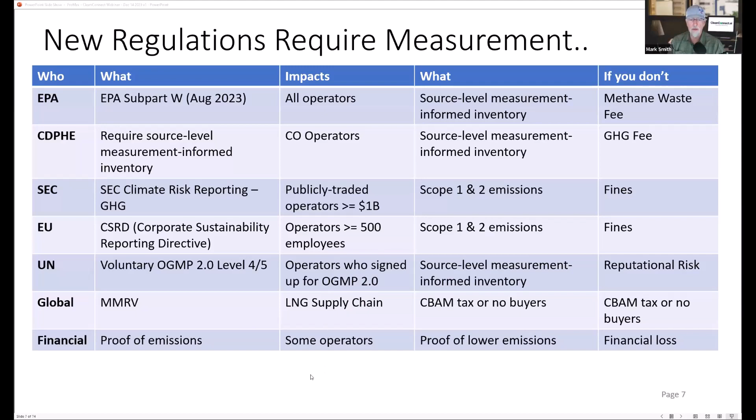But this one, the follow-on MMRV, which I'll get into, impacts anybody who wants to sell into the LNG supply chain. 20 countries have agreed to use this particular framework as the basis for trading LNG. The EU has said if you can't meet this framework or get below a threshold, there's a potential carbon border tax. We also have clients who need to prove their emissions as part of a sustainability-linked loan, or because they have ESG investors, or for numerous other reasons, even insurance companies requiring proof of emissions. So lots of reasons why you need to measure.

EPA subpart W, the timeline. As an EPA cheat sheet - I've been covering this stuff a lot so I'll go over it briefly - basically subpart W drafts hit in 2023. Quad B and C were finalized, and that's done now. About mid-2024, the states have to send in their SIP plans, or state implementation plans, to the EPA, and then subpart W will be finalized. The new super emitter regulation is another reason this is going to hit - basically satellites flying over the continental US, and eventually I'll show you the world, looking for 100 kilogram per hour or more leaks.

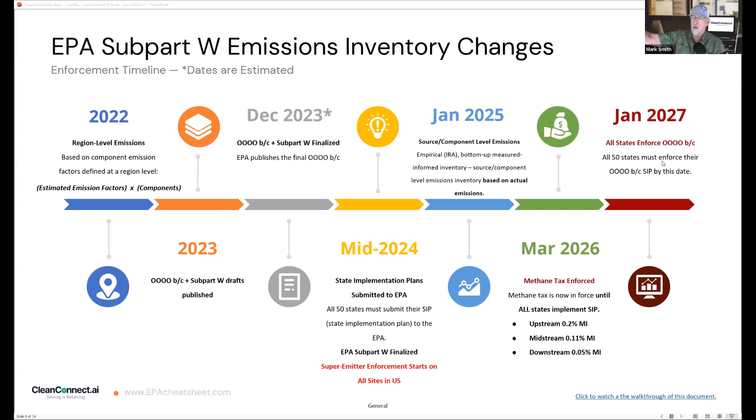January 2025, everybody should be doing source level measurement, okay, to do a source level. Then March 2026, you turn in that 2025 data and you could have a methane fee based on that data. Upstream, if you exceed your baseline of 0.2% methane intensity - midstream is 0.11, downstream 0.05. And January 2027 is when those states are supposed to implement their plans, which are equal to or more strict than Quad B and C and subpart W.

Here's something in a global look of it. So as I mentioned, a lot of these things are coming - 2023 the drafts, 2025 empirical measurement starts for US, EU CSRD. The methane tax kicks in, EU reporting is due, and this global super emitter thing is happening. So it's happening in the US, could start as soon as next year. It could start worldwide in 2026, and then carbon border tax.

The worldwide piece - is that still part of the EPA regs, or is that different? No. What's happened is, as part of this whole MMRV, these 20 countries said, hey, we're going to do the same thing. Gotcha. So basically, if you're a satellite company and you qualify, you can not only win a US contract, but a worldwide contract. Okay.

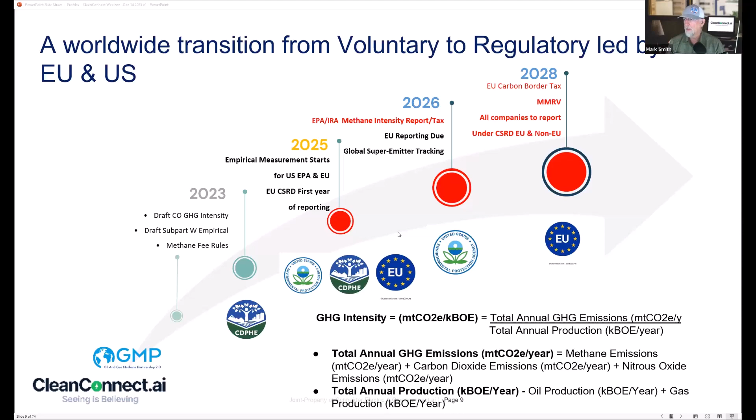So when we look at this, as engineers, software engineers trying to figure out how do we solve this for our clients - is this 5 different projects or one project that has 5 outcomes? So we look at the puzzle of the EPA stuff: subpart W, Quad ABC, MMRV, OGMP, Colorado's regs. And Colorado is probably the toughest of all of these, to be honest. That's where we got our government approval, and then financial and SEC. So we look at the whole puzzle.

Subpart W introduced this idea of 5 new measurement methods. Basically, the lower the number, the lower the uncertainty, whereas higher numbers mean higher uncertainty. Direct measurement is method 1 - so like a continuous flow meter, or our solution, continuous OGI with quantification. How you determine if you're there is if you can measure the duration, size, and source of an emission event.

Then they introduced the idea of engineering calculations, and ProMax is actually mentioned in subpart W 26 times, saying ProMax version 5 or higher is an approved engineering calculation tool. So when you combine direct measurement with a calculation, you can get method 2 - we'd combine it in different ways to get this, and I'll show you an example. Then, if you'd like, you can use ProMax by itself for a site-specific simulation - that's level 3. Level 4 is where you're using LDAR, so you can reduce the number of days in the duration of an estimated leak. And number 5 is basically emission factors, what we have today.

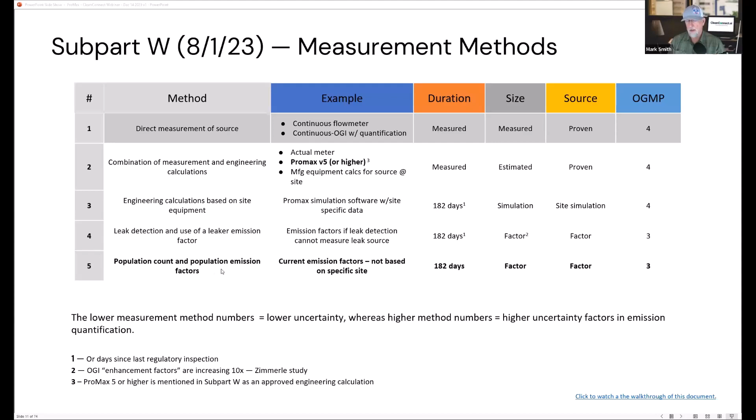So an example of why measurement is important is this: let's say you had a cold venting, unlit flare. Direct measurement - let's say our OGI would go around and catch it.

We'd see the start and stop times and we would send an alert. Let's say our client was able to reboot, separate, or do whatever to get that thing back, and 50 kilograms were released. Under the Inflation Reduction Act's third-year tax at $1,500 a ton of methane, that would be about $75, and it's below the 100 kilogram per hour threshold of a superemitter, so it's not one.

But let's say you just had a thermocouple and temperature started dropping. SCADA sent you an alert, and you rebooted it, but 200 kilograms got away - that's $330, and yes, that's a superemitter.

But now you get down to just calculating by itself with no direct measurement. Subpart W forces you to use some of these defaults, like 182 days, or the default emission factors. You can see it could add up quite a bit if you were to use tax. Again, this isn't supposed to be tax advice or anything like that - we're just trying to show you what these different measurement methods get, all the way as you fall all the way down.

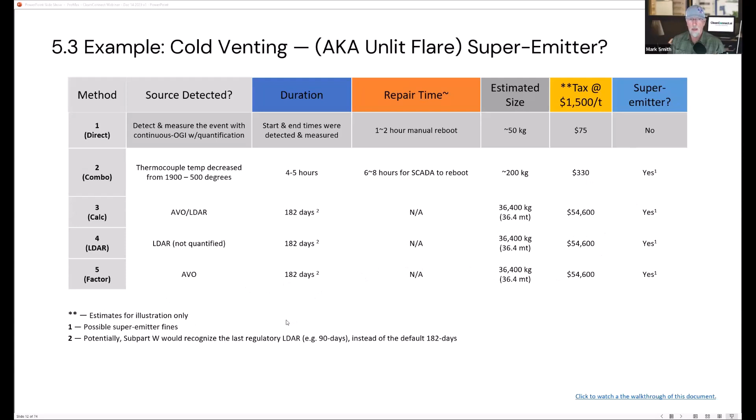Now, LDAR, for example - you could make a claim, subpart W does have something to say about it. But I did a regulatory LDAR 90 days ago. Can I use a 90-day default instead of 182? They seem to allow that to happen. And then factor 5 is just standard emission factors. So you can see the implication of direct measurement - why you're really going to want more of that.

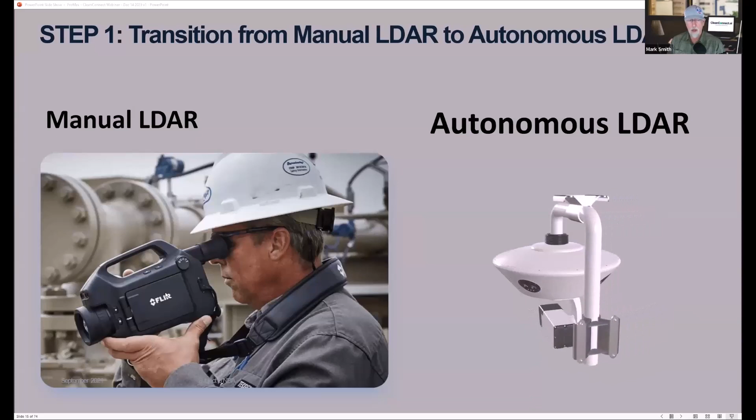So, monitor, measure, monetize. Our first use case is autonomous inspections. It's basically taking what most of you do - guys going out and doing manual LDAR - and replacing it with autonomous LDAR.

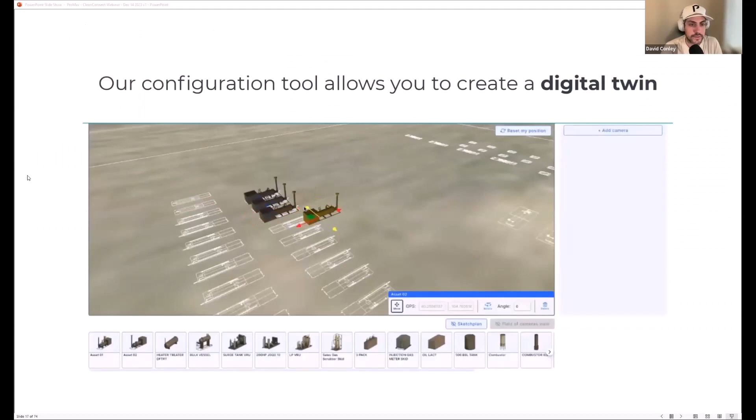In our scenario, typically we have one camera on a site. It can cover, I don't know, David - 99% of upstream sites are covered by a single OGI camera mounted on a pole, along with some other cameras. That's about right? Yeah. The exact numbers, or the certification, allows for up to 100 meters at 5 kilograms or less MDL. Our recent testing gets us closer to 280, 300 meters, depending on the size of the leak. So in terms of a superemitter, 5 kilograms an hour is much different than 100 kilograms an hour - so yeah, we've got quite a bit of range for sure.

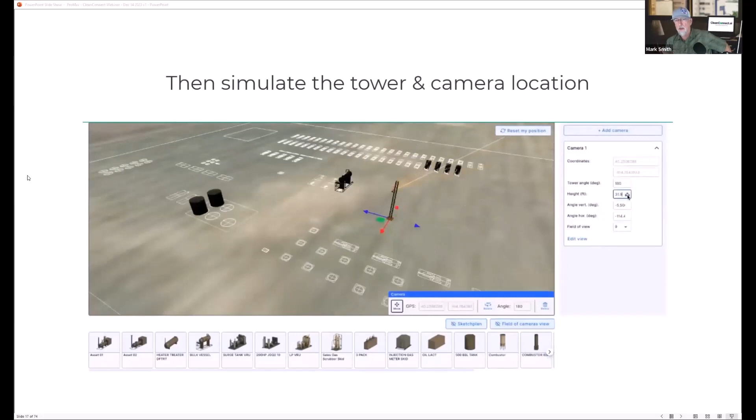Now, one of the things your team has built, David, is this brand new digital twin thing. At first it was just built so we could not guess where to put a tower, but literally simulate on site. So when their installers are there, they can tell precisely where to put it for the best viewing angle.

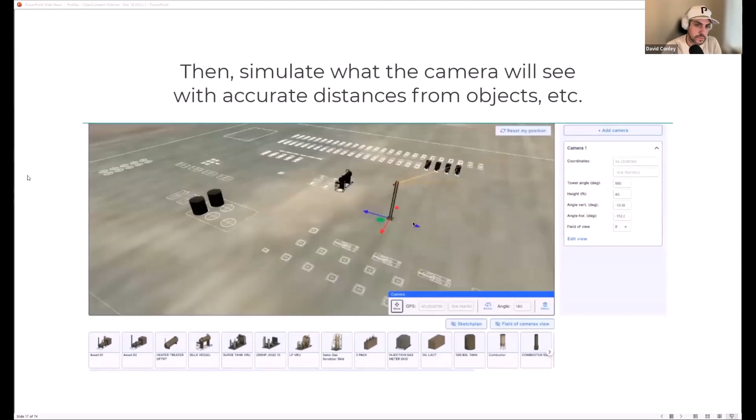And then in addition, when you get down, we allow tour stops within it - so if you say these 4 tanks in a frame, you could name it, set the pan, tilt, zoom, whatnot. But then also you're able to draw a polygon around a specific object, so that when we see an emission event on that tank, you can then measure the emissions for that specific tank. But it allows us to do some other things.

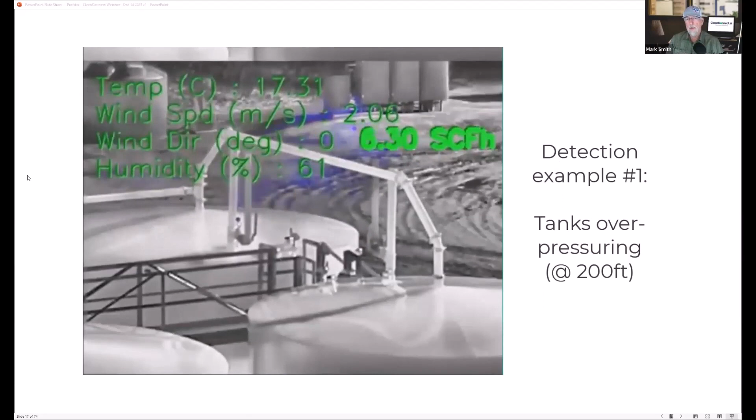Here's a tank overpressuring 200 feet away - as you can see the leak, you can see what it is, you see it's being measured. Here's cold venting at 4 a.m., 300 feet away. So yes, we work day or night.

24/7. And here's one that really drives some technologies crazy - a load out event. A truck shows up, doesn't connect correctly, starts leaking, and then it drives away. So after it drives away, you still have to figure out what the source was. Yes, it's an emission event that could literally, if it was leaking that much, create a superemitter event. You get dinged, but at least you could have the proof with our stuff - you caught it, and you're showing them, 'it wasn't us, it was a third party truck.' Now they may blame you anyway, but okay.

So how many videos do we have? We've been doing this continuously on so many sites that we've got well over 1 million videos. Right now our model's trained on 30 million data samples or so. So the things we see are cold venting as a big one, tanks overpressuring, loadouts like you saw, and others. That's why we showed you those 3 examples - because they're the 3 most common things we see.

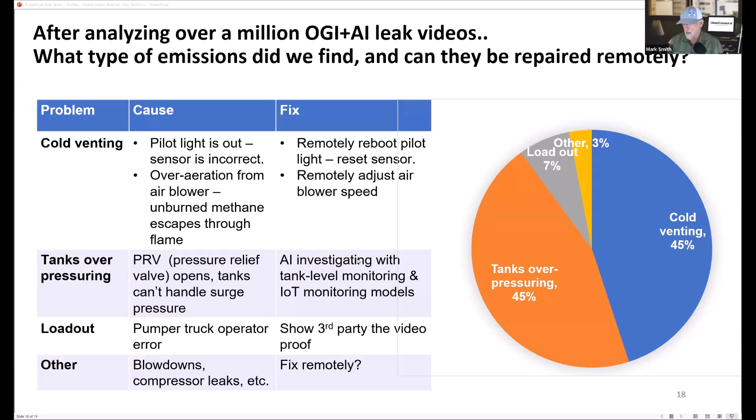So not only can we monitor them, we measure them, we can report on them, but you're going to see later in this presentation how we're actually trying to prevent those things, even prevent super emitters.

Okay, this is what we had to do to get our Alt-AIMM, the alternative approved instrument monitoring method from Colorado. We had approved source level detection, then blind testing, and David can talk more about that, and then LDAR equivalency. We had to prove that our autonomous LDAR was equivalent to monthly manual LDAR. Alternative work practice: we had 2 operators endorse our application, and then we got EPA Region 8 approval. And it came with a workflow.

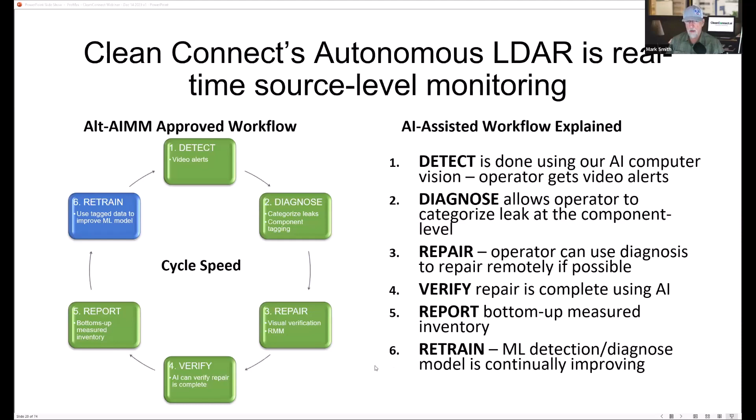So what it means is that if you use CleanConnect, it replaces the need for regulatory monthly LDAR, regulatory AVO, regulatory tank emission monitoring. And for our clients, that eliminates 92% of the regulatory scheduled callouts.

Now, what's new in the brand new Quad OBC that just dropped, it's very similar to the Alt-AIMM, okay? They added a few innovations, I think. Proven spatial resolution: so when alternative technologies apply, they have to have a proven spatial resolution. In our case, we're at a component level, so we can see within 0.5 meters of a source. Area level is 2 meters from a source, and anything above that is site level. Same blind testing protocol. Equivalency, you prove against—in this case, for EPA, it'd be quarterly LDAR.

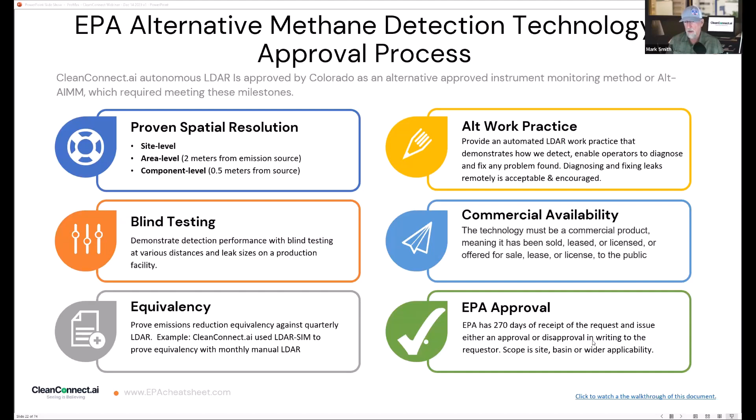Alternative work practice. And then they added the commercial availability—they will not approve anything that isn't available to the public to be sold, leased, or licensed, okay? And then, of course, EPA approval gets you countrywide approval. They have a portal with timestamps, and if they don't refuse it within 270 days of receipt, you're going to get approval or disapproval.

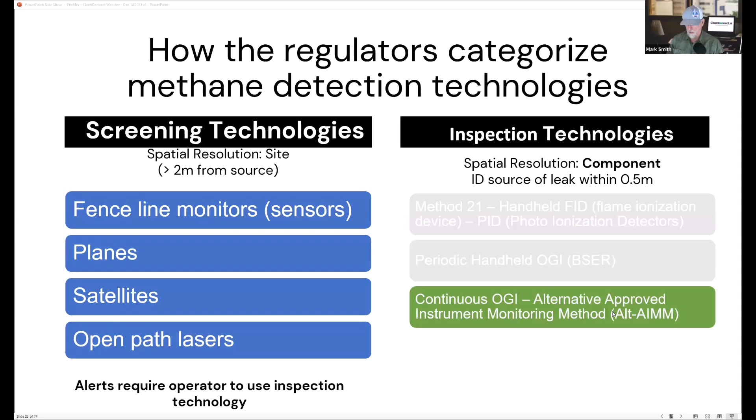Now, where the spatial resolution really comes in on the regulations is this. Screening technologies are anything that cannot see less than 2 meters from a source, or it's greater than 2 meters—so fence line monitors, planes, satellites, open path lasers. Alerts require the operator to use an inspection technology. So with these continuous things like fence line and open path, every 7 days, if it exceeds the baseline, which is set in the first 30 days of operation of the particular technology, then you're required to send an inspection technology. Inspection technologies are defined as a spatial resolution of component level—so Method 21, periodic handheld, or like our solution, which is continuous OGI.

And anyway, David, you could talk about this testing that we did for blind testing. Sure. Yeah, I actually have a question in the queue that I can answer while I talk through this.

Someone asked, what are the limitations of autonomous monitoring? For example, OGI has wind and temperature limitations. True, right? And whenever we go back and talk about equivalency, that's the key—what is equivalent versus a monthly LDAR inspection. In Colorado, it's monthly; in other states, it's less frequent. So whenever the temperature and wind change, you're going to see something, right? So depending on the temporary conditions, that doesn't disprove equivalency, if that makes sense, in the modeling.

So yes, you're right, there are conditions that are less conducive to detections, but how long do those conditions last, right? And is it going to be more frequent than every 6 months you're running an LDAR inspection, right? So that's kind of the lens that you back that up against, if that makes sense. So I hope I answered that question, but also this is going through kind of the blind testing results.

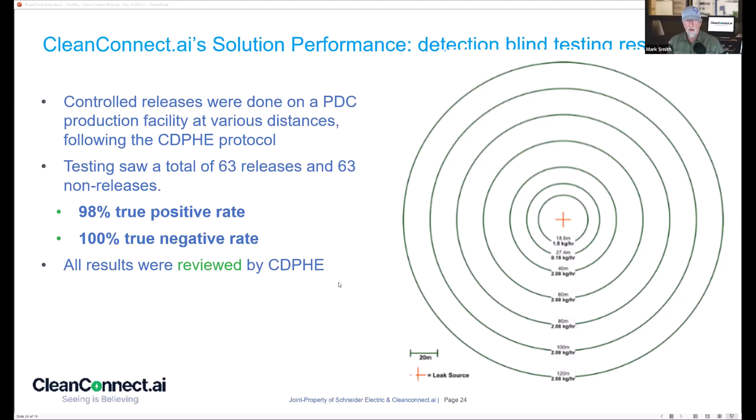We did all these in our production facility, the blind testing, and all the results were reviewed by CDPHE, the Colorado regulators. And then we also used that data to do quantification. You talk to this slide a little bit.

Sure. As part of that, with that controlled release data that we have, now we have ground truth—truthfully, this is how much is leaking at this flow rate. So we wanted to back-test that and see how accurate the quantification coming out of the AI model is, just without any additional information, which we've tightened with ProMax. And so that's the magic, right?

It is. We have these raw data outputs coming from the OGI plus the model simulations, and that's a little bit of the magic we'll talk about, cracking the code. But this is raw data.

78% accuracy with an 8% outlier rate, and that's tested against 2 kilograms an hour leaks. So that's just what the data look like—it's just kind of raw data.

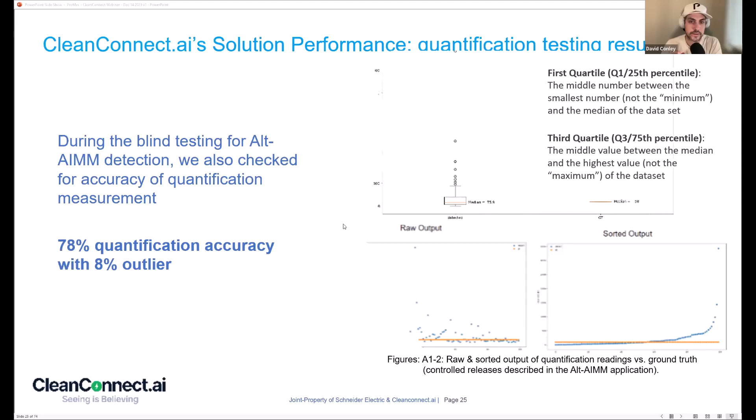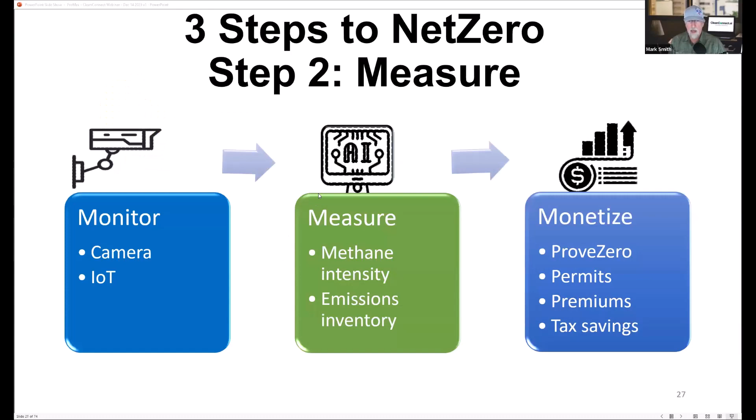So, next step, measure. One thing that's important, especially for our clients that do OGMP, is this idea that they have these 5 levels. I won't even talk about level 1 and 2. Level 3 is called generic emission source level—this is equivalent to today's emissions inventory, which is emission factors.

Level 4 is specific source level measurement inventory. That's first, and then you reconcile at the site level. That's one of the things we'll be showing you how we do.

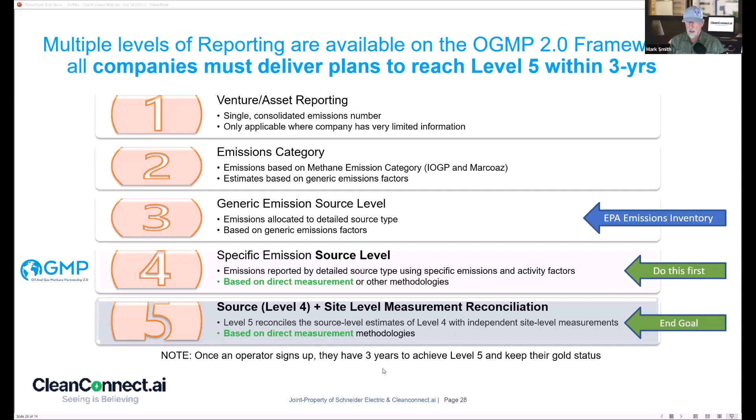Now, building on top of OGMP level 4 and 5 is MMRV. These countries have gotten together and agreed on this measurement, monitoring, reporting, and verification protocol that's built on top of 2.0. So they're starting there, saying if we're going to be trading LNG, for example, between these or any other product, this is the protocol we're going to use to measure that methane in terms of carbon border taxes or whatever.

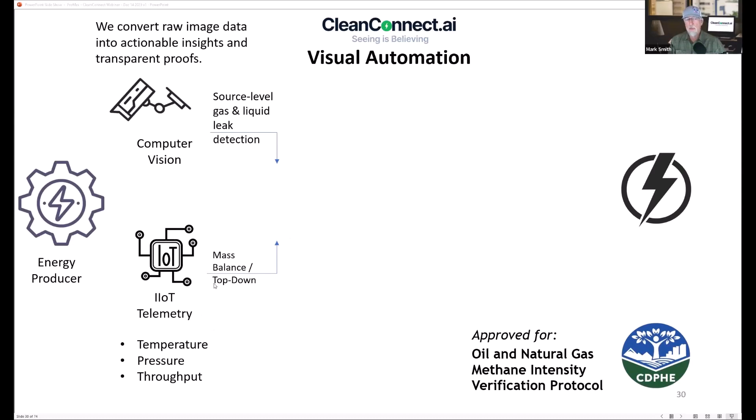We built the computer vision stuff, but now we tap into the IoT devices, and we add BR&E, the ProMax version 6, with the data exchange feature. All that runs through our AI model.

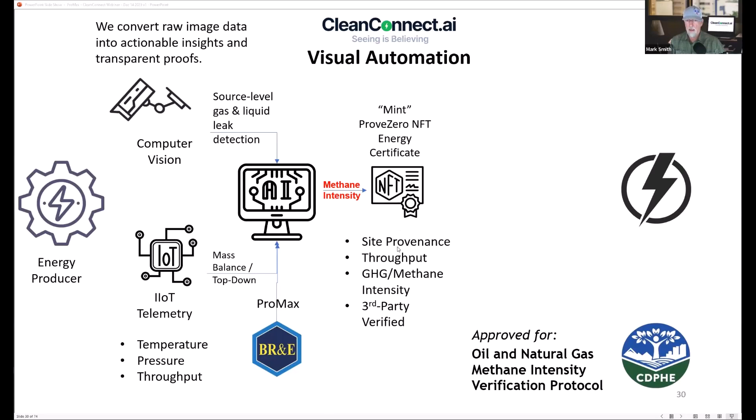The original idea was we had a client, Triple Crown, that said, hey, can you create for me autonomous methane performance certificates using the S&P protocol? So we did that. Then Colorado came out with their source level measurement informed inventory, which was originally called Reg 22, or Regulation 22. We were approved, built into their regulation and framework—ProveZero is the name of our system to do that.

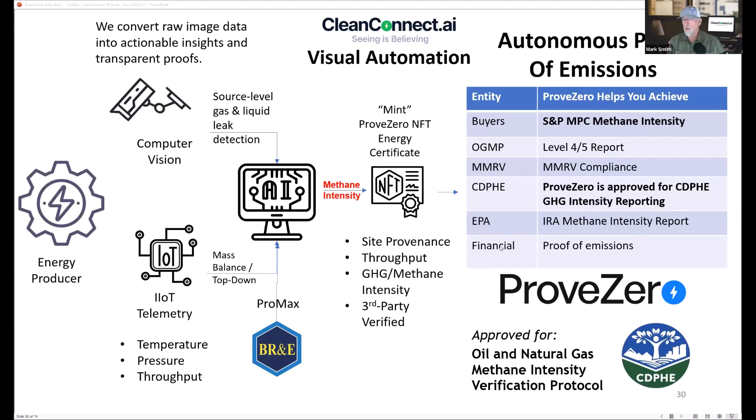In addition, we started looking at the puzzle piece and saying, well, if we can grab computer vision, measure leaks, look at the IoT devices, and run that through ProMax, what all can we do? Can we help produce some of these other reports as well? So this section is autonomous measurement using ProMax plus CleanConnect to automate emissions tracking with process simulation.

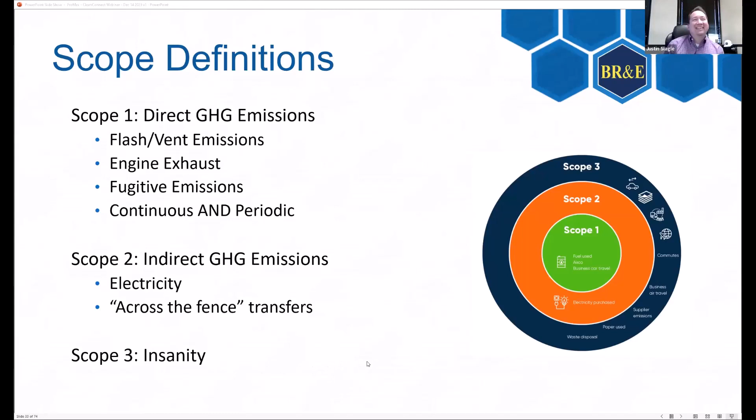That's a scientific term, insanity, right? That's right, there's the definition.

So then basically the reason it matters that the SEC is getting involved is because there's one really important document that your board of directors are required to submit to the SEC. These are for publicly traded companies, and they're going to need to submit their Form 10K. Now this is an important document because if you are found lying or hiding things along those lines here, you can actually be found criminally responsible for it. So it's going to be something - I'm not a lawyer here, but that sounds pretty important to get right.

And so that's going to bring in a whole bunch of different people to calculate these emissions, and the board of directors are going to need to be working within the company in order to find out what those emissions are.

But when we're looking at all of this, there are several different methods of calculating these. Looking at those top three, there are your emissions factors, and that's pretty much old news these days. The emissions factors are the quick and dirty way to make these types of calculations. It looks like these agencies are moving further and further away from recommending those emissions factors.

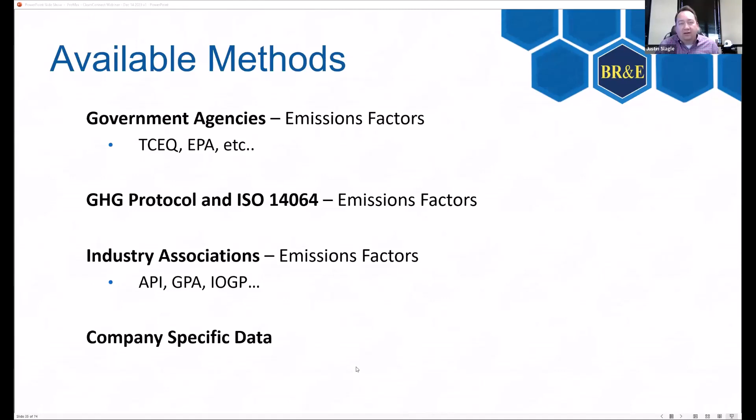But then we have the company specific data at the bottom, and that's actually where we plug in both CleanConnect and ProMax, which is why it's making it quite reasonable for us to be working together on things like this. A company's specific data could be things like using direct measurements like flow meters and cameras and LDARs, things like that. There's emissions software that you could use as well.

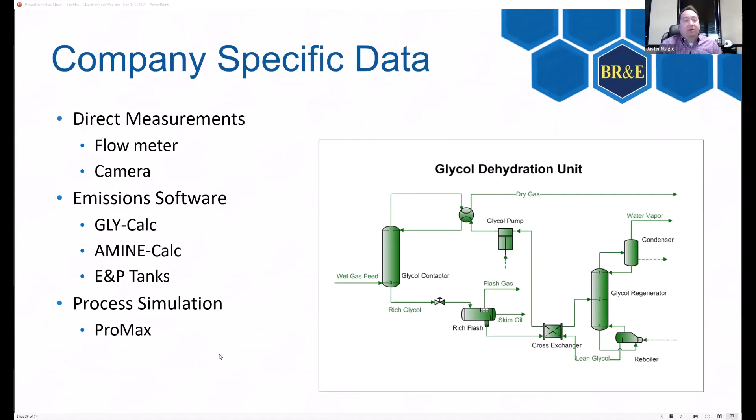Those three that come under the emissions software, those use more of a correlation type calculations, which are more so on the emission factor side of things, but not quite emission factor because it brings in more of your company specific data. But then we have process simulation down there at the bottom, and that's the one that is going to be fully customizable to your site. The reason I say that is because that one actually takes into account the first principles approach to calculating these emissions. It uses a physics-based method of calculating emissions, so it's actually not using factors at all anymore in this. And now you're actually getting real defensible, realistic results that are actually backed up by the science, not just by a bureaucrat coming up with a factor.

Right, and just to comment on that, that right there was kind of the aha moment for me. We were sitting down working through mass balance, and one of the chemical engineers we're working with, she said, well, I can see that source. Can you tell me what pressure and orifice size and temperature is in that line? And I can tell you how much is leaking. And that was it, right? It was wait, the visual piece of it mixed with the thermodynamic modeling and the physics of ProMax, and now I can give you a duration, right? And now all of a sudden you have a very interesting case of measurement, a very defensible measurement right there, so that was it. I mean, that was cracking the code from my perspective. Excellent, yeah, that's a good way to put it, because ProMax will not let you break the laws of thermodynamics.

And so that's kind of a neat thing about it, is a good sanity check of what you're actually calculating. Yep, good point. So then let's look at what we have, what the operators are looking at.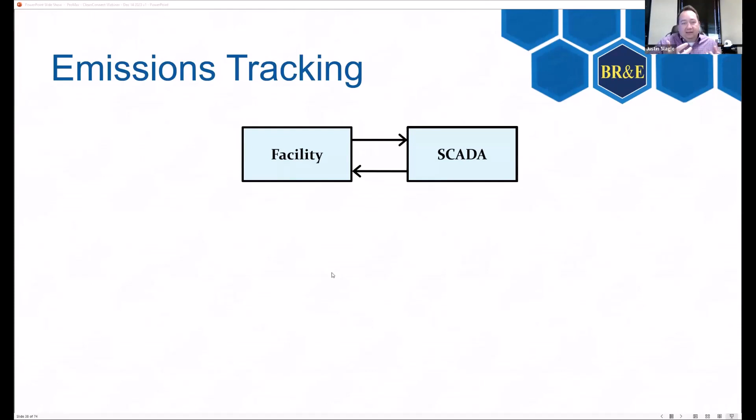So they have a facility, and they connect that facility up through instrumentation with a SCADA system, which will take the data that those instruments report from the facility and organize it and put it into some type of format, which will then go into your historian. All of this is currently automated. Typically, when you install the instrument, you create a SCADA system, and then you attach that with a database.

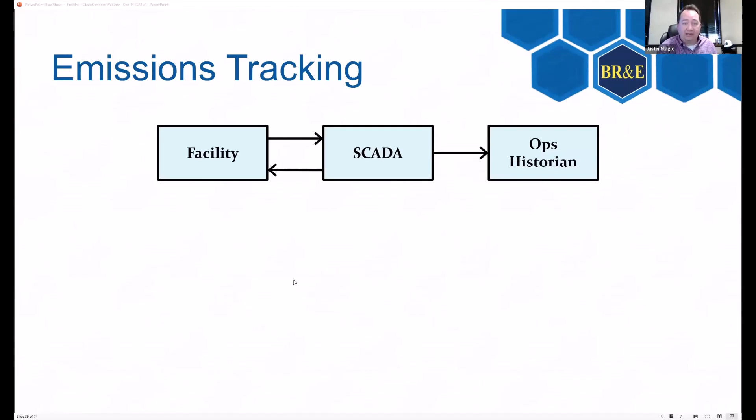Now what we're proposing is you take that information from that ops historian and build your model from it. This has been done for a little while, but it's all been done by hand. So these engineers or emissions consultants, these air consultants, will go find the data. They'll have to rummage through lots and lots of information, find the pieces that are important, record that somehow, probably copy and paste it into Microsoft Excel, and then go into the ProMax model and hand put it all in there.

Then after they do the model and make those calculations, they're going to be sending that over into a database or some type of reporting method as well.

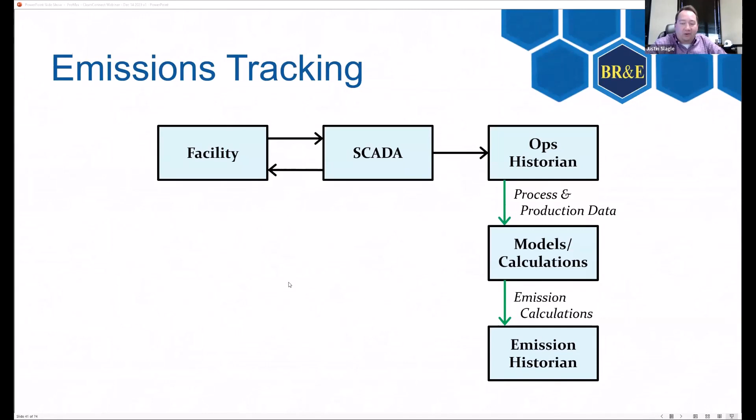If you'll go to the next slide here, you'll see that you have your emissions historian, where you'll start storing that information. A lot of times that historian is really just an Excel document. And then they take that information from the historian and start feeding it to all these other different places, copying and pasting from Excel into an emissions inventory.

They'll copy and paste from that—looks like it's probably going to go into their 10K coming up pretty soon. And then they'll copy and paste it from the historian and send it over to make operational decisions, if they even do that at all, because a lot of times the air folks and the engineers are not actually making decisions together, or the information from one isn't necessarily influencing the information to the other.

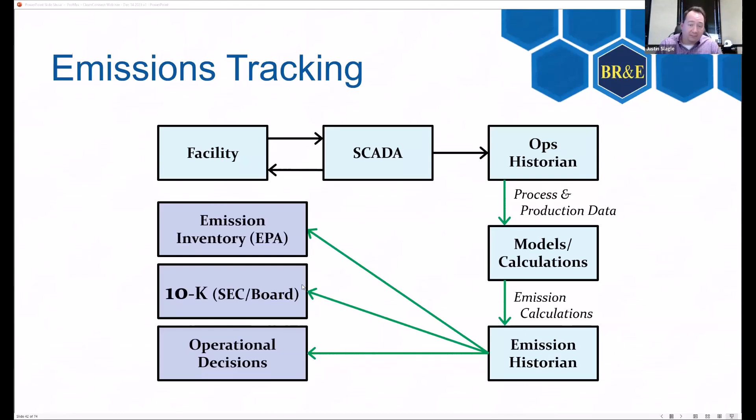So if we look more closely at this, at the ops historian to the model to the emissions historian part of this, this is where we see a lot of room for improvement, because there's so much time taken up with this. This data is manually taken from the ops historian to the model, and then manually taken from that and put into the emissions historian. If you have a large number of facilities to maintain, which almost every producer does, that can take a bunch of time, and it's a lot of repetitive calculations.

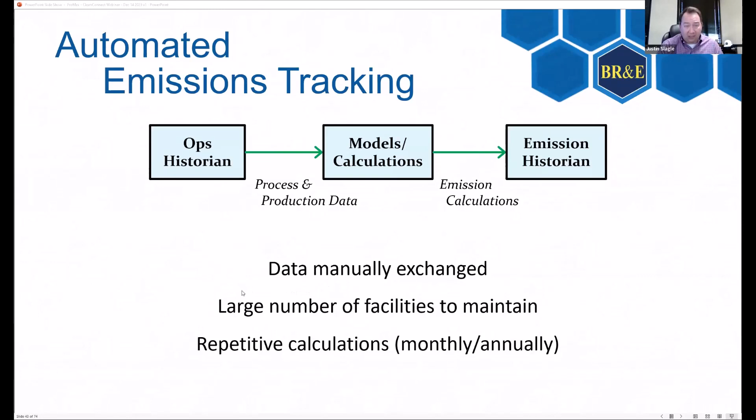All these engineers or consultants have to open it up every month, relearn it a bit, and do it all over again, over and over and over again—or do it once a year, and then they really have to relearn it over and over again if it's only once a year as well.

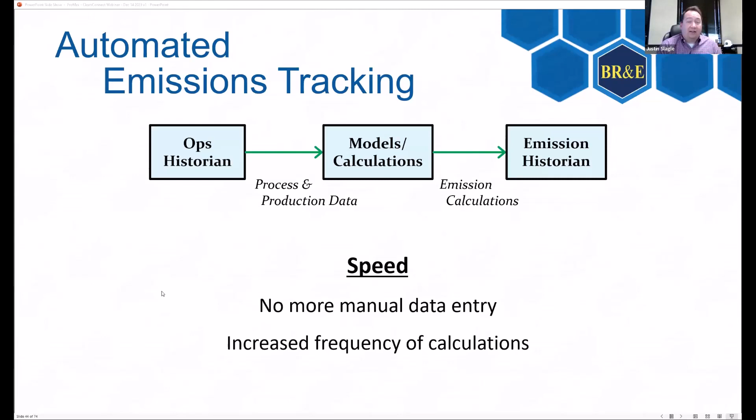So what we can do is speed it up. If we remove the manual data entry and increase the frequency of calculations, it's going to work a lot faster. So what we propose here is automating it, okay? And once we automate all these pieces of it, we will have less human error.

And we're going to be using a physics-based model like in ProMax, and all of it is going to be completely transparent. It's going to be auditable. You'll be able to go back in time and see exactly what you did. You can even pull up the model that you used at whatever period in time you did this, and everything is going to be completely reproducible, which will be a pretty neat thing to be able to do.

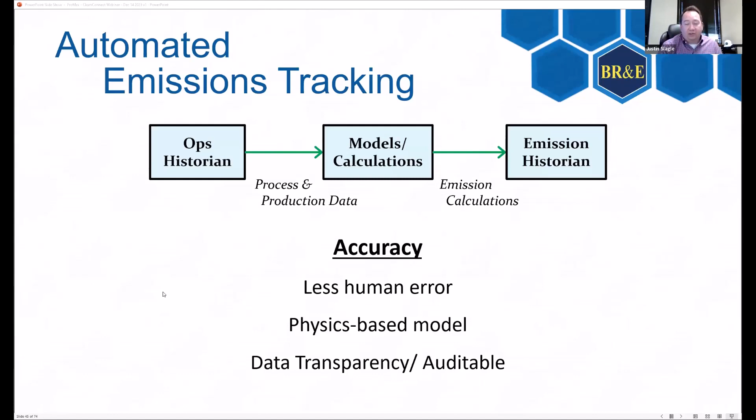And then you can scale it up. At this point, you scale this up, and you can have one model that can represent a whole bunch of facilities. We have one customer right now using one model to represent 800 different facilities. It does it by bringing in site-specific data for each one of those cases, and then we'll go from site to site to site, and all the data will change from one site to the other, but it's still just one model that you'll have to maintain, which is really, really slick.

So then you can use these three things here: the scale—you can scale it up, you can make it faster, and you can make it more accurate—by automating all of this.

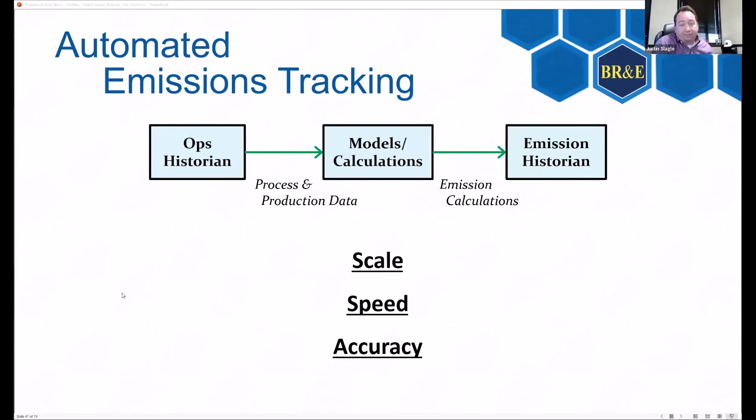So when you look back at this system, you can see we can automate it going from ops to the model, and from the model to the historian. And then we can even push data back into the SCADA system again, if you want to, which you'll see on the next slide, showing that progression as well.

When you automate all of those pieces, your work as an engineer or air professional is basically setting up that initial model and then linking it to whatever tags exist in the historian. Then you choose how often you want the model to run and for which facilities, and then you let it rip.

It can run all year long. So far we've had some of these models running for 2 years without needing to restart or anything like that. We've even set these up in case the computer shuts down — let's say your server crashes and you boot everything back up after a weekend storm. Right when that computer boots back up, the ProMax model will be running automatically right from the get-go.

So there's not really going to be much human intervention once you have these running, except whenever you build a new one, or whenever you make a change — let's say you put a new piece of equipment in one of the facilities.

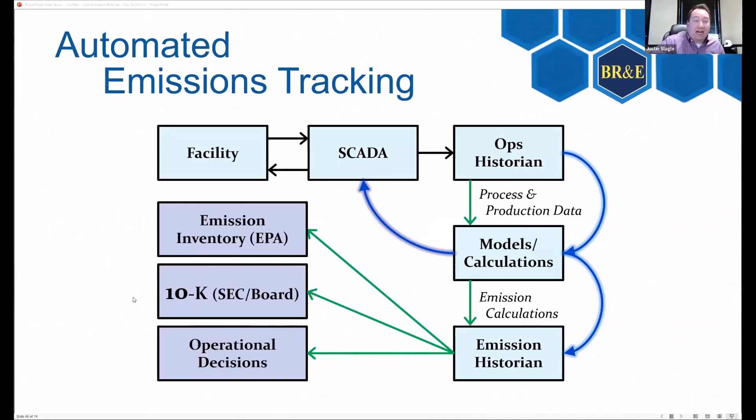Because at the end of the day, that's really what I want to get across here: if we can eliminate a whole day's worth of copying and pasting from one spreadsheet to another, I think that's a win. Yeah, absolutely. So here's how we've done exactly what Justin just said, our exact setup.

So we have our cameras, which you've seen. They connect to our edge device. We can even connect up with Cimarron's SyteLink 360 to get more data in real time. Go over to SCADA, MQTT or Modbus. It's in SCADA, and then we get a feed right out of SCADA, just like he showed, through our ProMax data integration, and then our CleanConnect platform.

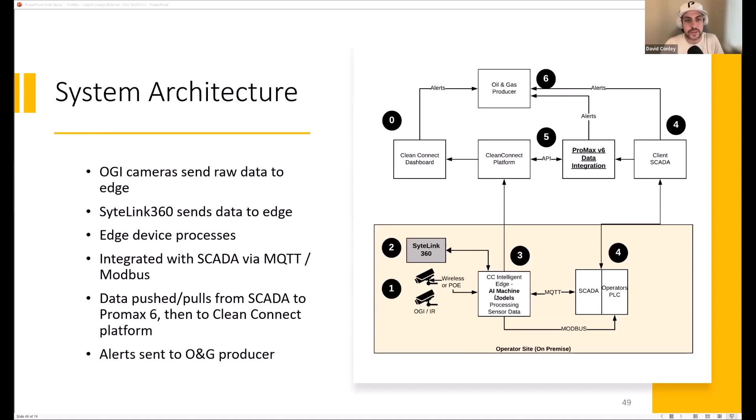What's a little bit unique is when the CleanConnect system is out there monitoring a site and a leak pops, now we have a way to say a leak is happening right now, and we'll go pull the simulation. So just like you'll set up the model at that facility, at this equipment group, we're going to run that simulation during the duration of the leak, and we're going to give you a measured inventory for that fugitive emission and non-fugitive as well. That's what's really unique about this combination.

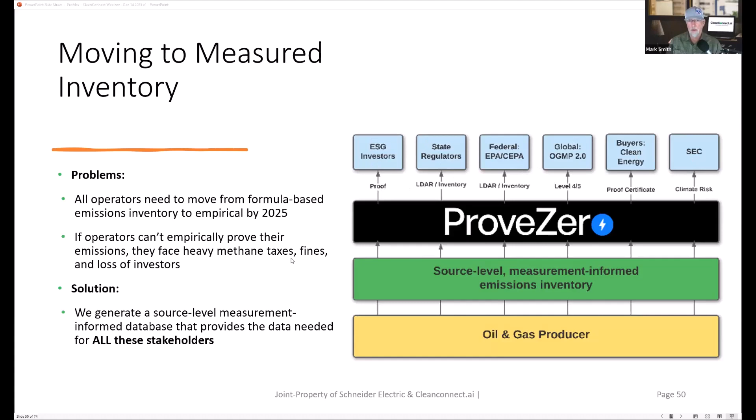The big idea here is that all operators are needing to move to some empirical data, and if they can't move, they face a bunch of fines. But by doing this, we can create a source level measurement inventory that can satisfy all of these different stakeholders, which is really important. We put this for Triple Crown because they're one of the first ones to do this with that methane performance certificate. And Civi — we're working with them on all their sites to get all this real-time measurement going as well.

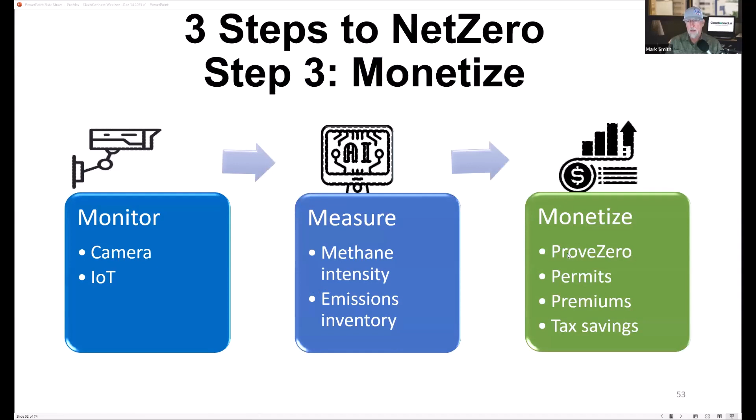So how do we monetize that? Well, here's what different clients are trying to do: minimize methane taxes, earn carbon credits, win ESG investors or keep them, comply with sustainably linked loans, earn certified gas premiums. So we have all these different scenarios.

And one in particular that's coming up because the growth of LNG is about 25% compounded. The problem is that the countries didn't agree on a methane intensity measurement, and now with MMRV they are. So with this, now we can actually create data, record emissions, and capture that into the blockchain and create NFTs for upstream, midstream, LNG plants, and the ship.

So when they take that over to Germany to a floating regasification plant and they say, hey, can you prove your methane intensity across the supply chain? The answer is yes. Great, come on in without paying the border tax. But if you can't prove it, pay the border tax.

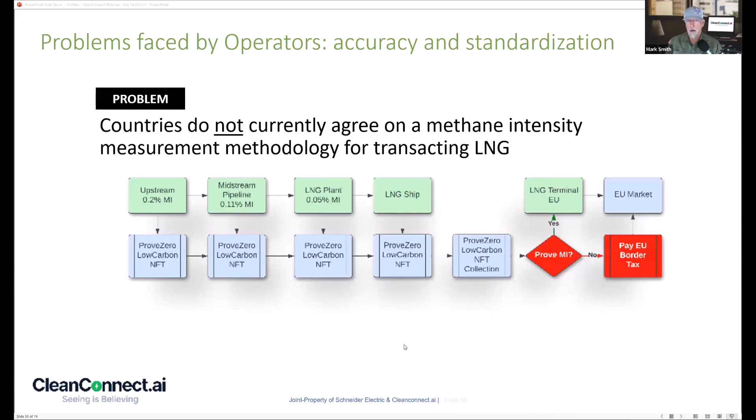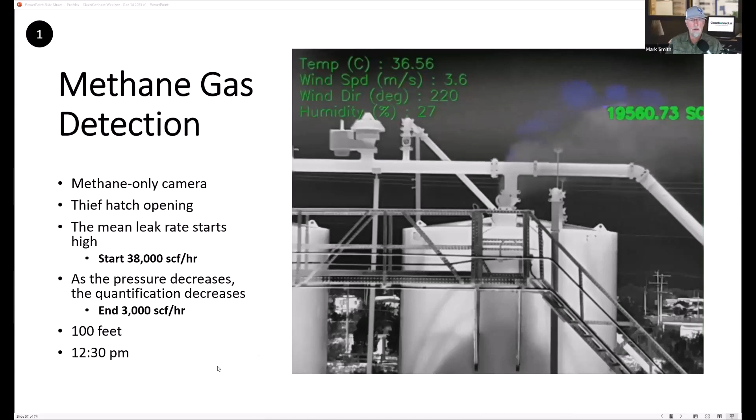So there's another way to monetize this as well. Here's an example we did where it cracks open a leak and starts to measure it. You can see as the pressure relieves in the tank, the quantity starts to reduce. But in our system, we're tracking the beginning and end of all that.

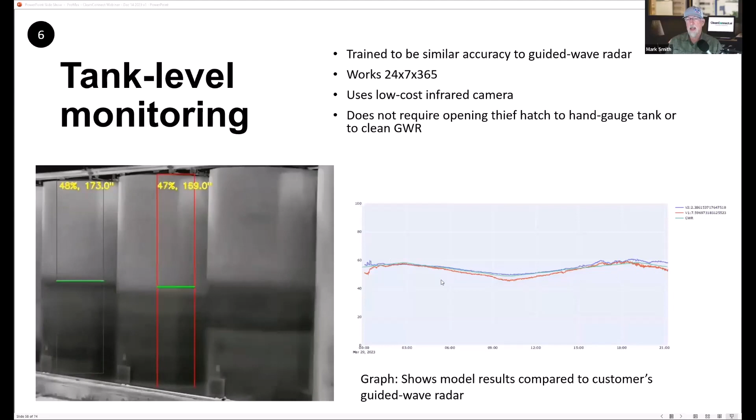We also do tank level monitoring, so we can use this data as well. We're nearly as accurate as guided wave radar. There's actually a graph showing how we compare against guided wave radar.

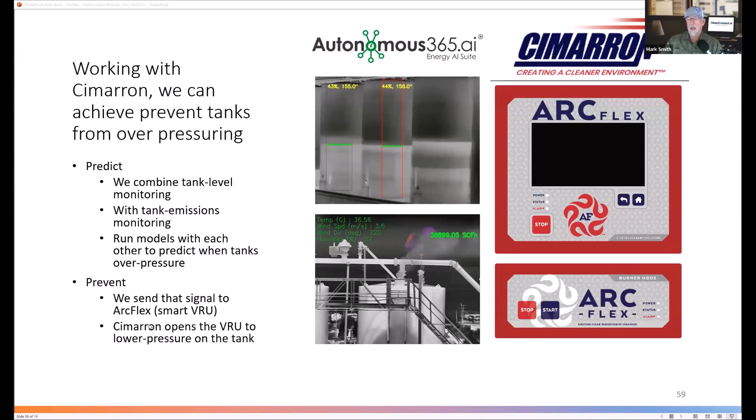Now, what you could do with that is pretty interesting, because if you start using AI and computer vision, you can start to predict when tanks will overpressure. And then we work with our partner company, Cimarron, to actually control a VRU—they have a smart VRU system called ArcFlex. So we can say, hey, we think this is going to overpressure, send a signal, release some of the pressure, send that off to the burner, and eliminate that problem.

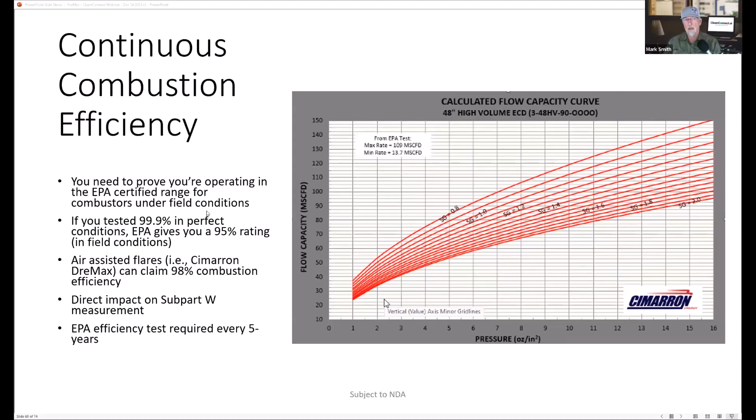Now, why that's important also in the next part is Quad OBC also says, hey, even though you get an EPA certification for a combustor that's 99.9% in perfect conditions, we're going to slide that down to 95% in field conditions. They do make an exception for air-assisted flares like Cimarron's DRE Max—they can actually claim a 98% combustion efficiency, which has direct measurement impact on Subpart W. You'll have to test these every 5 years, but the way the regs work, they say you need to be in continuous compliance with your combustion efficiency.

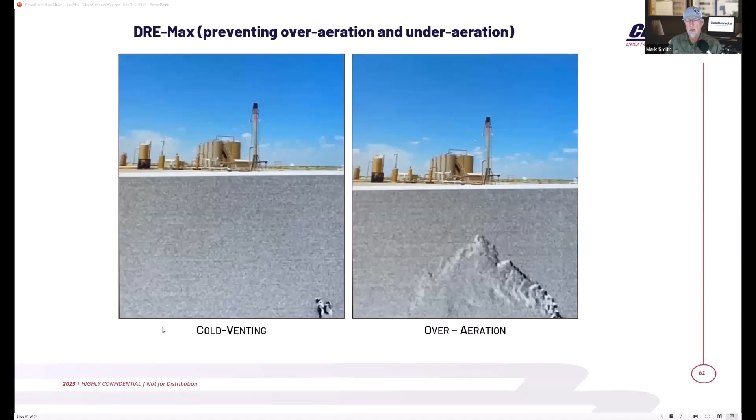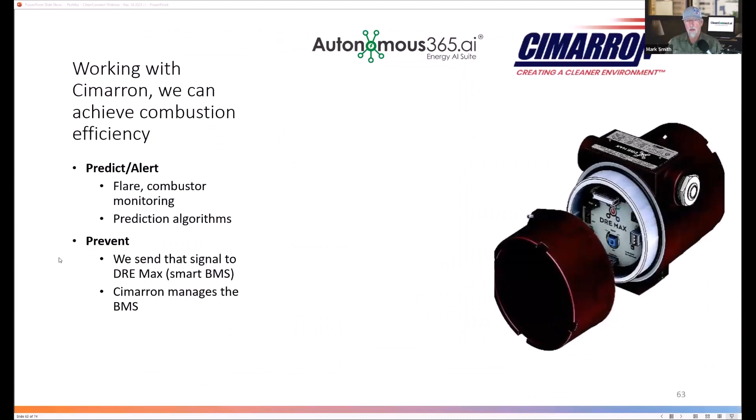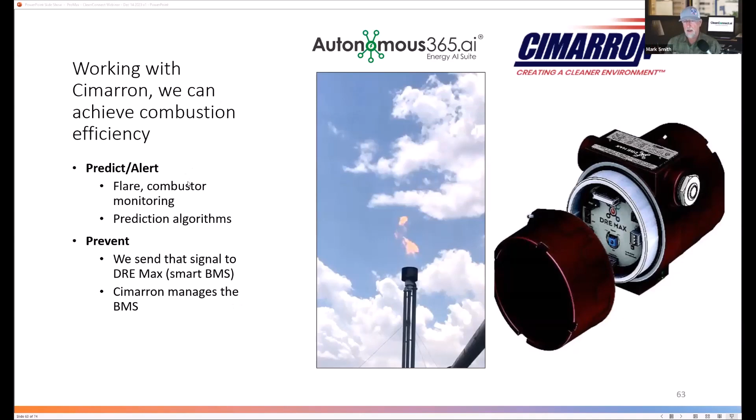DRE Max is another thing where you can see cold venting or over-aeration, and so we work with these guys to do computer vision plus their DRE Max so we can automatically adjust flares in real time. They have this DRE Max system that allows us to tap into it—we'll call it a smart burner management type system. So again, we're not only trying to monitor and measure cold venting and tanks overpressuring, but we're actually working with vendors who can provide direct measurement, but also remote monitoring and management for these specific use cases.

So David, why don't you talk about our brand new camera systems?

Yeah, this is super exciting for me. This is something we've worked on for the last 2 years or so, whenever we would put our solution in and the total cost of implementation was high. I mean, talking about OGI cameras, a lot of off-the-shelf compute, a lot of just off-the-shelf parts have been marked up 5-6 times before they actually get to the end user. So we wanted to do something about that, and we wanted a solution that was an all-in-one. And so we built it. We didn't intend to become a camera company by any means, but the market demanded it—one, because of price point, and two, because of reliability.

We were using a lot of off-the-shelf cameras, and frankly, they wouldn't last very long—we would have to replace them all the time. There's actually a question in the Q&A, and I want to answer that here: what is the maintenance and support frequency and effort to keep those running under various weather, wear, tear, and conditions?

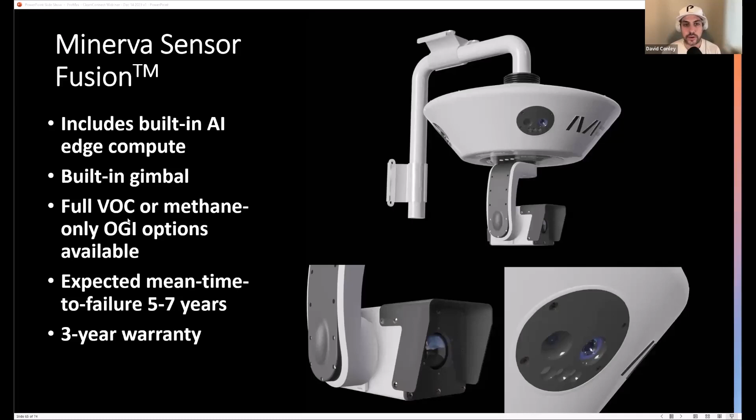So this is purpose-built for Autonomous 365, and it's purpose-built for oil and gas—very industrial environments. We have a gimbal built in to keep things stable in high wind situations. It's all IP66 rated. It's built for rugged environments. It has all your compute built in, has all your communications built into it, and it's modular. So as use cases change throughout the life cycle of a well or a central tank battery, you can pull that, you can modularize that camera to fit the budget of the well. Every well is its own individual company, and so we can scale up and down.

There's two different types of cameras, right? There's a full OGI VOC camera, which is what you guys are used to more than likely—if you're LDAR folks, it's a $100,000 camera. For some facilities that makes sense, and for a lot of facilities it doesn't make any sense at all. So there's a methane-only camera that's going to see 90% of what you needed to do from a methane standpoint, and that's a long-wave thermal camera.

You have a mean time to failure of 7 to 10, or 5 to 7 years, could be up to 10 years. So it's variable, right? It's variable on the conditions of where the facility is, but it's also built into the program. Maintenance is built in on a cooled core OGI camera. Those are as a service, and your warranties are built in. All of that is baked into the whole program.

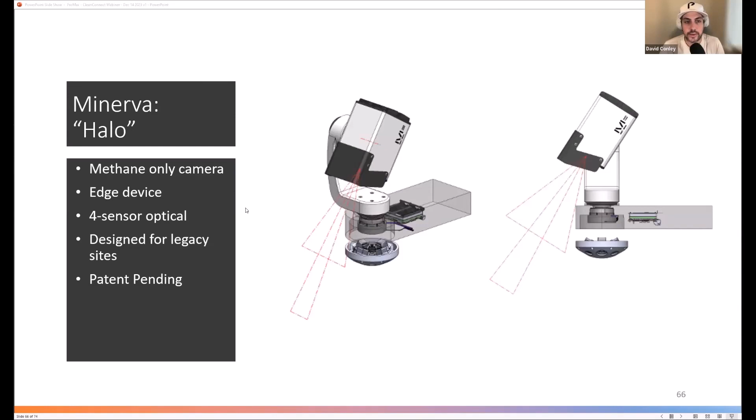So Minerva's very exciting, and it can run the Autonomous 365 package. There's a Halo version of it, which is the smaller version. So on facilities that don't need a full Minerva system, where you only need a methane-only camera and just some light security, then there you go. You can run a Halo system at quite a bit less in terms of upfront cost.

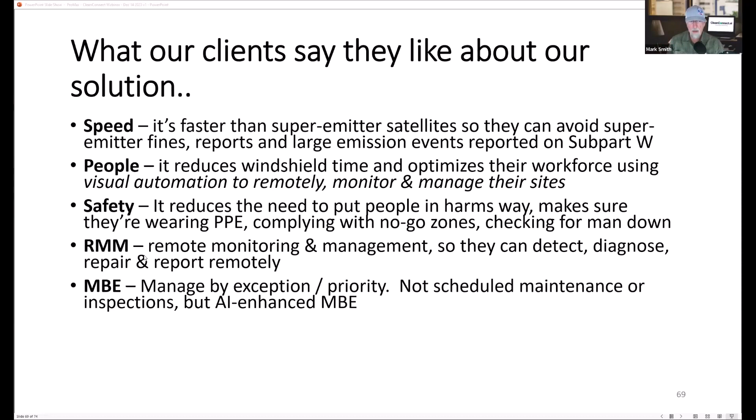So what our clients are saying, but they like it, is the speed, it's faster than the super emitter satellites. It reduces windshield time because they're doing way more remote monitoring and management. Safety, if you can send less people out to the field and keep them out of harm's way, it's safer. Again, remote monitoring and management, managed by exception. Everybody wants this, right? The clients want this so that they're only getting alerted when there's something actionable to do. And then the ROI is, our clients are telling us the system pays for itself by eliminating essentially one call out a month at this point.

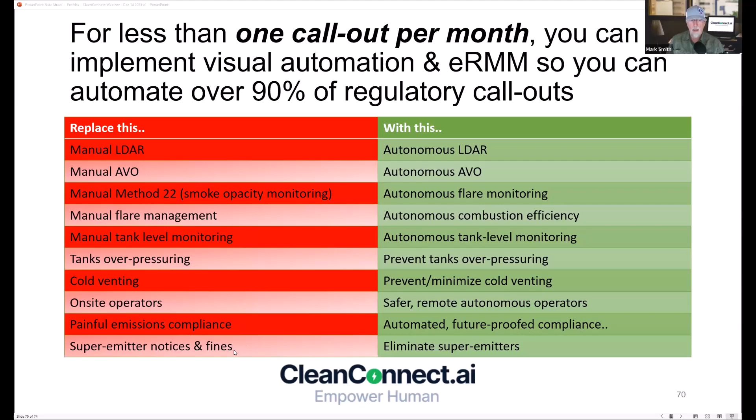So again, we're trying to get to this point where you're going from manual LDAR to autonomous LDAR, manual AVO to autonomous AVO, manual Method 22 to autonomous flare monitoring, manual flare management to autonomous combustion efficiency, manual tank monitoring to autonomous tank monitoring, preventing tanks from overpressuring, preventing cold venting, having essentially agents out in the field 24/7, safer remote autonomous operators, moving from painful emission compliance to automated future-proof compliance, and eliminating the super emitter notice and fines by just eliminating the super emitters if you can.

I can go into a lot of detail about this, but what engineers need to design into new sites is continuous monitoring, and regulations are all moving toward continuous monitoring. It really is pushing in that direction, and EPA is enforcing super emitter rules. So our system allows you, by building that in, to monitor for all these things. In addition, there's stuff we didn't show you, like liquid leak, fire, smoke, PPE detection, security, and much more.

ProMax, with data exchange, allows you to take that model that you use for a permit and then set it aside. Now it becomes real time, used right in production. And it provides first principles, auditable records, subpart W approved. And if you get CleanConnect, we actually include this ProMax data exchange, so you don't have to do a separate thing. We actually implement that for you.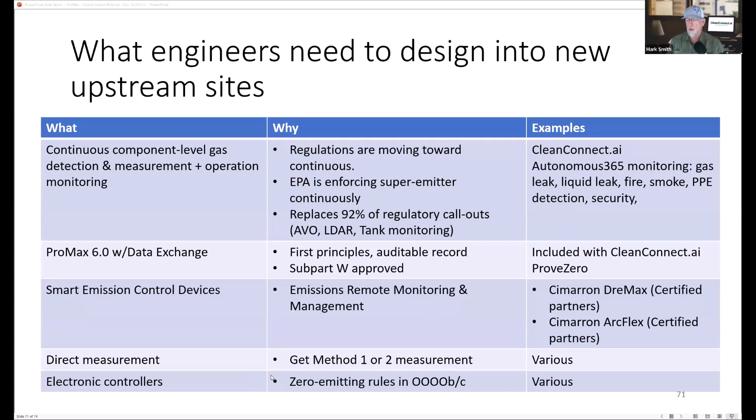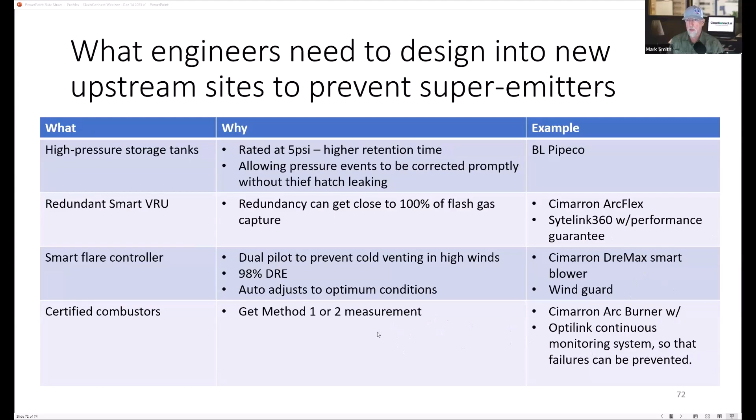Smart emission control devices like Cimarron, DreMax, and ArcFlex allow for remote monitoring and management, allow for direct measurement, and meet these new regs. And again, more and more manufacturers are allowing us to tap into direct measurement. Obviously, as you're designing brand new sites, high pressure storage tanks, redundant smart VRUs, smart flare controllers, and certified combustors and stuff. I can give you a bunch of examples of companies we work with and certify that they work with our system.

So anyway, I know I wanted to rush through that last part because I know there were some questions in there. So how does quantification compare to CleanConnect's current quantification via OGI? Oh, okay. So do you mean, Caitlin, I wonder if she means how does ProMax's quantification compare? Anyway, you want to tackle that one?

Yeah, I mean, the combination is really powerful, right? Both scenarios are going to be better in certain scenarios. But whenever you have redundancy there, you say, okay, I'm pulling two measurements. Every leak I'm pulling a CleanConnect measurement, I'm pulling a ProMax measurement. And then how do you reconcile those? That's the question. So I would say first principles is probably the best way to do that. Default ProMax calc, and then matching duration and adding the duration into that is what's going to be really, really powerful. That's how I approach it, at least that's my philosophy on it.

With CleanConnect's ability to do continuous LDAR, and then using ProMax to supplement it, they're really first to market on this. What's exciting to me is that with the ProMax model, you know what your composition is everywhere, always in your system. And what continuous LDAR is able to do is say, oh, you're having some emissions right here, right now - it could be brief or long. If it's long, ProMax will probably catch that too. But if it's brief, unless you have ProMax running every 2 minutes, I'd use the composition from ProMax plus the continuous monitoring from LDAR, and that's going to give you a pretty solid result.

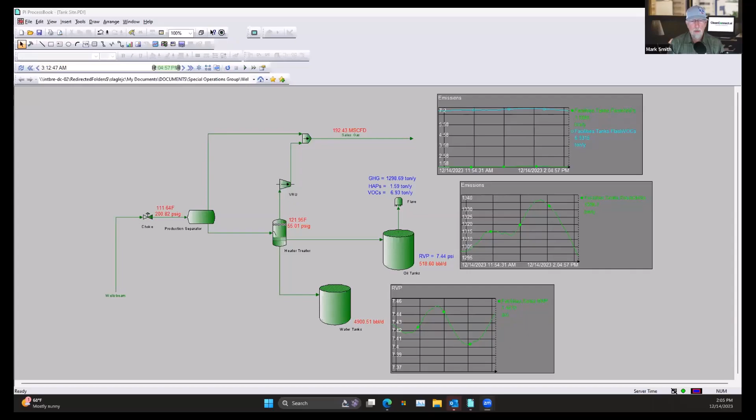We appreciate everybody for being here and are super excited to be working with ProMax, BR&E, solving a really complicated problem. Honestly, I can't even imagine how we would solve it without it. We're so grateful for this piece of software you've labored to create, because it really helped us get the job done for our clients, our mutual clients.

Excellent. Yeah, no, I'm excited about it too. This is a really, really amazing product that y'all have created. I'm really excited to see it in use more and more everywhere I go. So this will be good to see.